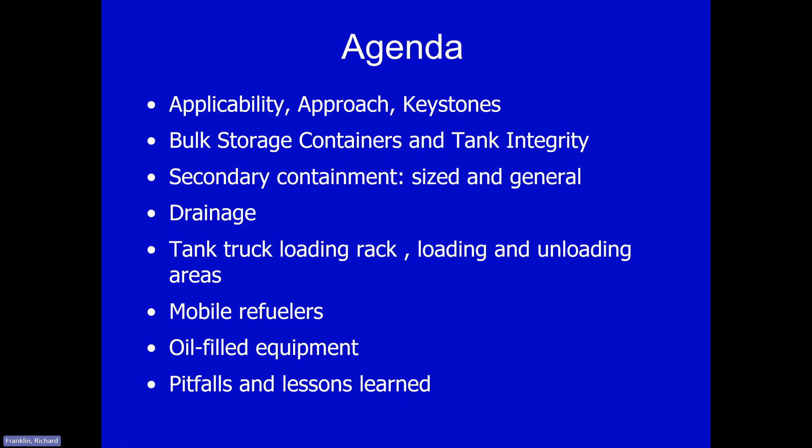So we're going to start off right away. I hope you can hear me okay; if there's any issues, I'm sure Rajib or Amy will let me know. What we'll go through are some major items, components of the rule: first off, some of the keystones, applicability, and then things like bulk storage containers, containment, pitfalls, oil-filled equipment, and some other items like that.

So what is the rule? The rule's been around for a long time, promulgated and became effective in 1974, and the authorization is from the Clean Water Act. This rule applies to facilities that, by virtue of their location and what they're storing, could reasonably be expected to have a spill get to waters of the United States. Some of us joke that it's not authorized by the Clean Dirt Act - everything is based on a threat to a waterway of the United States, or WOTUS.

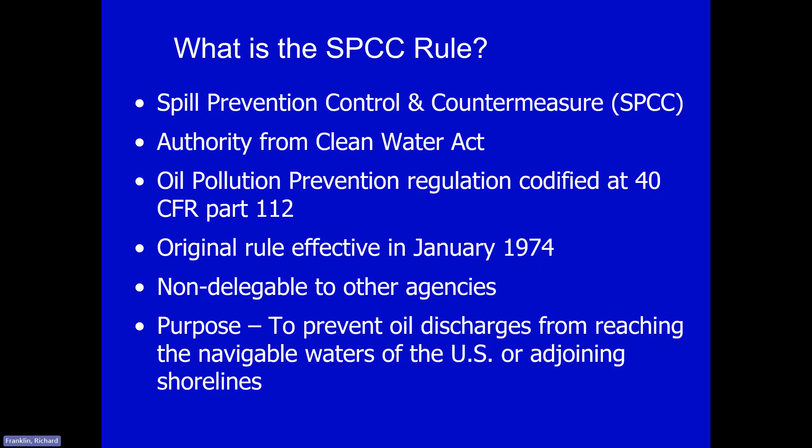Under the rule, they call it navigable waters of the United States and adjoining shorelines, but that's the same thing as WOTUS, waters of the United States. As you're probably aware, that's been in flux with different Supreme Court decisions and litigation. The rule is codified in 40 CFR 112. As Rajib was saying earlier, it is not delegable to any other state, federal, local, or tribal agencies, and the main reason we have this rule is to keep oil out of waters of the United States.

There must be a plan. It's got to be written and implemented, and the plan really should be site-specific. You're going to hear this over and over again from me: it really needs to deal with your site, your waterway, your surroundings, your operations, and how you can prevent oil from getting to waters of the United States in your area.

Some of the keystones, again, are secondary containment and procedures to prevent oil spills. If you have an inspection and there are violations or deficiencies, one of the key things we're going to look for is: do you have adequate secondary containment? Do you have containment at all? You must have measures to control it, keep it from getting to waterways, and be ready to go should you have a spill.

So this is all about keeping oil spills out of waters of the United States and adjoining shorelines - that phrase is in the rule as well. So if the spill gets to the waterway, a creek, pond, or river that's defined as waters of the United States, then potentially enforcement can trace it all the way back up to whatever the adjoining shoreline is.

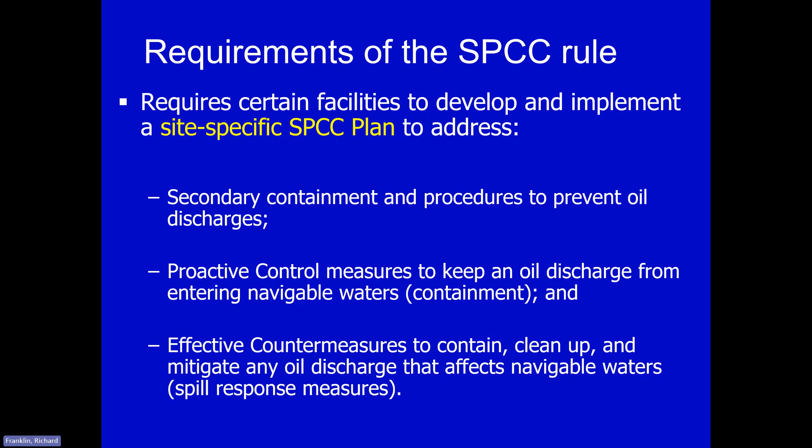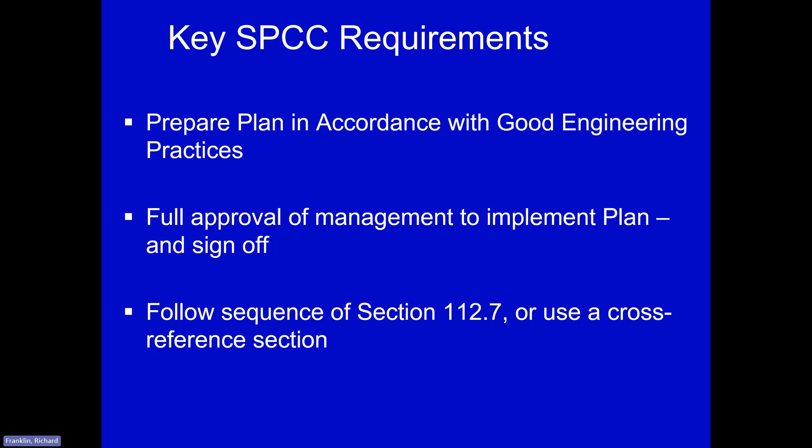So what do you need to prepare? A plan with good engineering practices. Most plans are signed off or required to be signed off by a PE, professional engineer. We look at the PE as a third-party regulator, really, and the plan should have full approval of management, and this should follow the format of the rule in 112. You can use a cross-reference if you like, and we'll get to cross-references a little bit later. There needs to be a signature on a management approval page, and the PE will need to sign off on it, again done with good engineering practices.

As I mentioned a little while ago, this is a site-specific plan. We have plans that show up from companies that may have multiple terminals or facilities in an area, and they might want to write one general plan for the whole thing, for all of their facilities within that area. There may be some commonality between administrative stuff in the plan between different facilities, but really they should be talking about each facility, the waterway that it's threatening, and how to prevent it from getting there, and the procedures at that facility as well. It's fine to have some generic language mirroring the rule, but what we really don't want to see is just generic language only, not dealing with the site-specific information in the facility. What we say is that the plan should mirror what's really going on in the field in your facility, and whatever is really going on in your facility ought to be mirrored in the plan, as far as how you write this.

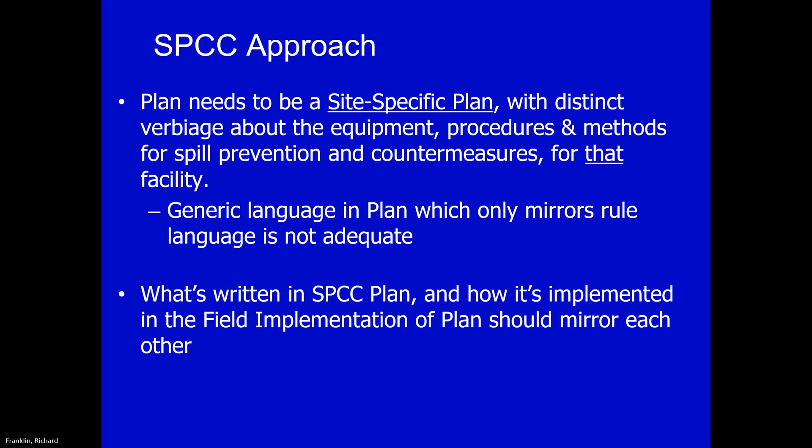Talking to Rajib, he asked me, Richard, what's important? And I'm like, well, okay, so having a well-written plan, implementing that plan. When we show up to do an inspection and review the plan, one of the main goals, of course, is reviewing the plan against the rule. But one of the big things is, can you implement the plan? Is the plan being used as a doorstop, or is it just sitting gathering dust on your bookshelf? You understand that you have to have these for regulatory compliance, but it should really be able to be used. You're supposed to train your employees, your oil handling employees, on it as well. So it should really be implemented.

You should have appropriate secondary containment. We'll talk about containment in depth a little bit. Tank integrity is also hugely important, and you need to have adequate drainage control. So those are some of the big things that we really look for. We'll note sometimes that a plan might be written well, and when we show up at the facility, the plan looks good on paper, but it doesn't really have any reality as far as what's really going on at the facility. Those need to mirror each other.

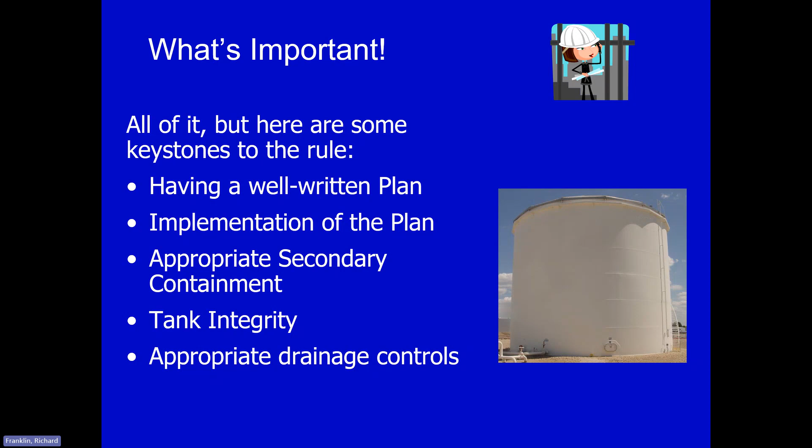We're going to jump right into bulk storage containers. Again, some of the main things in the rule - this is in 112.8C. A couple of things right off the bat: it says that no container should be used for the storage of oil unless its material and construction are compatible with what you're storing and the conditions of storage. So the climate, for instance - what's in your area? Are you in a wet climate like I'm at, here on the West Coast teaching from west of the Cascades where it's very wet? Maybe you're in the Gulf Coast of Texas where I'm from originally, where it's also wet and rains a lot. Conditions of storage - is it salty air, sea air? Are you going to have more corrosion? Maybe you're in a dry place where you don't get much rain. So again, the container really needs to be able to store and be compatible with materials stored, whether it's crude oil, diesel, gasoline, naphtha, whatever it is - construction of it, and pressure and temperature.

And then secondary containment - again, we'll talk about that. You've got to have secondary containment for the bulk storage containers, and you'll note that the rule says bulk storage containers, which includes things that are not tanks, like drums and totes and things like that might meet the regulatory thresholds.

It also says in 112.8c that diked areas should be sufficiently impervious to contain spilled oil, which is interesting, right? We do not have any quantitative rule language or guidance on what impervious means. In 112.7c, which governs the whole rule as far as containment goes, it says you've got to be able to hold oil until it can be cleaned up. In our guidance, we say that should really be up to 72 hours. So we'll get into that here a little bit more.

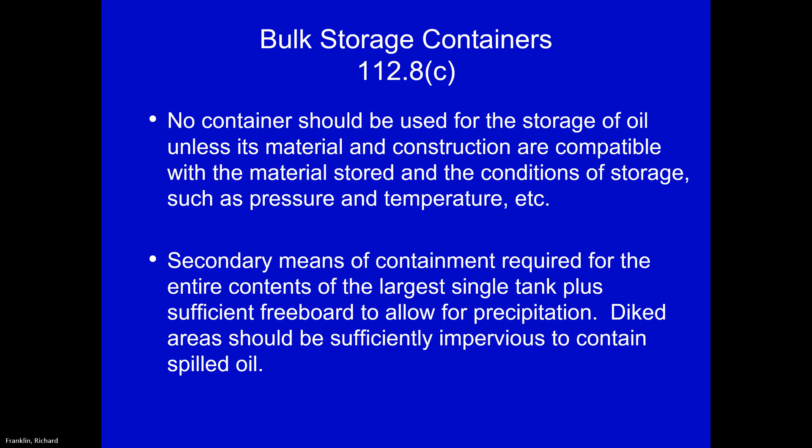Surface rust is one thing, but when we see large-scale pitting and corrosion, delamination of metal, we'll say again that's a violation or deficiency. It's no longer compatible with conditions of storage and what's being stored in it.

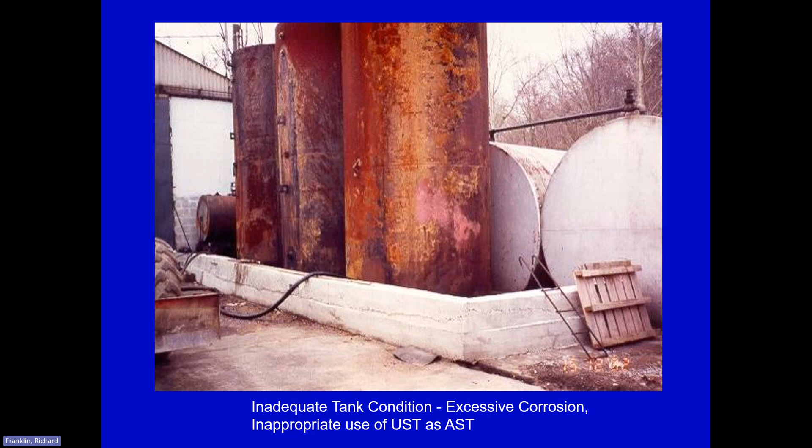They've got some housekeeping problems. The rule doesn't talk so much about housekeeping per se, but that could be a safety issue for you. If you have things like this metal ladder that's against the concrete, if that's leaning up against metal tanks and it just sits there, or other metals, then you can induce corrosion cells and that becomes a problem as well.

So that gets to routine inspections and integrity. The rule says you've got to do routine inspections and tank integrity testing. And for tank integrity testing, the rule says the owner or operator must consult with the industry standards. We'll get to those in a minute to determine what kind of integrity testing is required for the specific type of tank that you have, what's the frequency of it.

Certainly you've got to be doing visual and outside inspections as well, looking for deterioration, leaks that might cause a spill - well, it's already spilled inside diked areas - especially looking at the base of the tank and foundations and supports, because that's where so many of the stresses are going to be. You might have water at the base of a tank too internally, which could cause corrosion or begin causing corrosion.

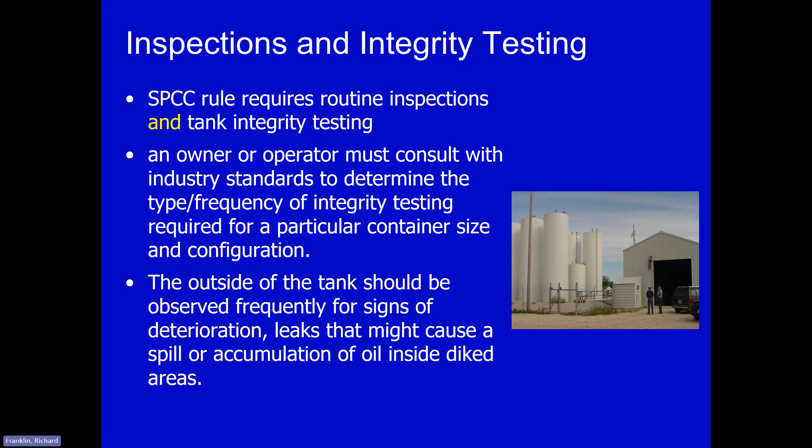So there's a lot of confusion surrounding these. What standard should you use? Now, I'm not a PE, but we look at the standard and what the most appropriate standard is.

So API, American Petroleum Institute - that's the most appropriate standard for large field erected tanks. The Steel Tank Institute, SP001, is most applicable for shop-built tanks, drums, totes, and some small field erected tanks.

Now, we have our own PE, actually with EPA, that sits on one of the technical boards of STI for SP001, and that's helped us try to understand and be more flexible and realistic on how that standard would apply to these smaller containers. We see that smaller tanks are often completely overlooked.

For instance, at a bulk storage terminal, refined products marketing terminal, distribution terminal, the facility is certainly doing API 653 integrity testing for their larger tanks - 55,000, 80,000 barrel, 30,000 barrel, 100,000 barrel tanks. And then they forget, in the 10,000 gallon additive tanks, that those also have to be looked at as far as tank integrity testing.

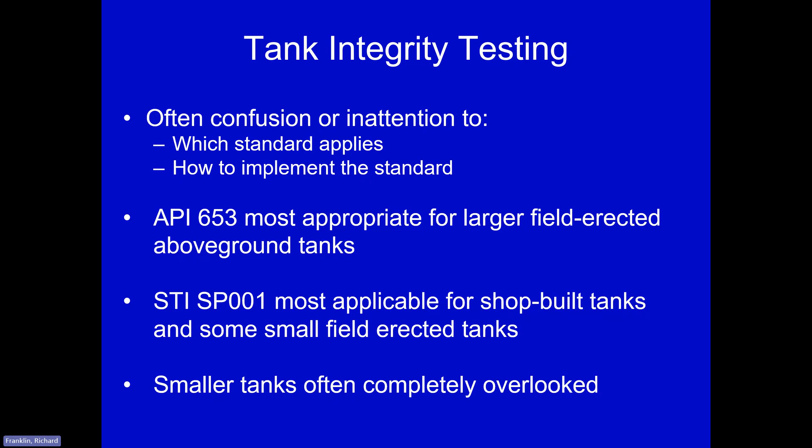Again, API 653, what does it cover? Field-erected steel storage tanks built to the API 650 construction standard and its predecessor, which was API 12C. Specifically developed for vertical petroleum storage tanks with a maximum internal pressure of no more than 2.5 psi and a temperature not exceeding 200 degrees Fahrenheit per the scope. The tanks that are heated higher than that have other standards that apply to them.

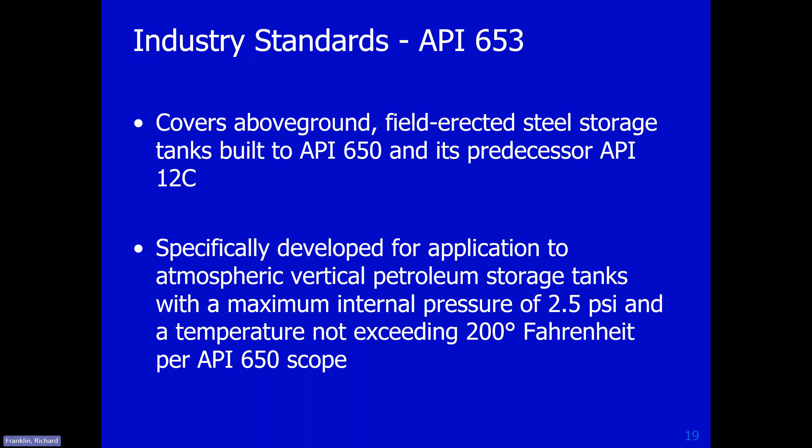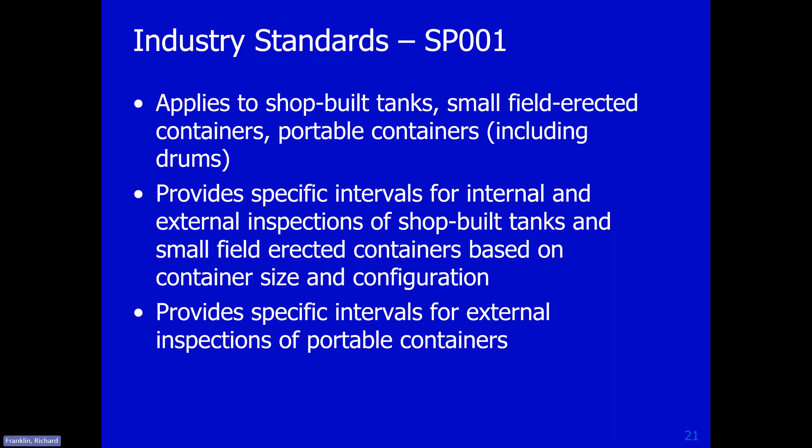SP001, the Steel Tank Institute standard, applies to shop-built tanks and some small field-erected tanks and portable containers. It has a chart laying out specific intervals of internal and external inspections of shop-built tanks, based on size and configuration, and gives specific intervals for external inspections of portable containers. Most of the inspection interval is monthly and annual. Depending on tank size and configuration, and whether it has a release prevention barrier or secondary containment, it may only need visual inspection for much of its life, which gives a lot of flexibility. It's not quite as rigorous as API 653 might be, certainly for smaller tanks.

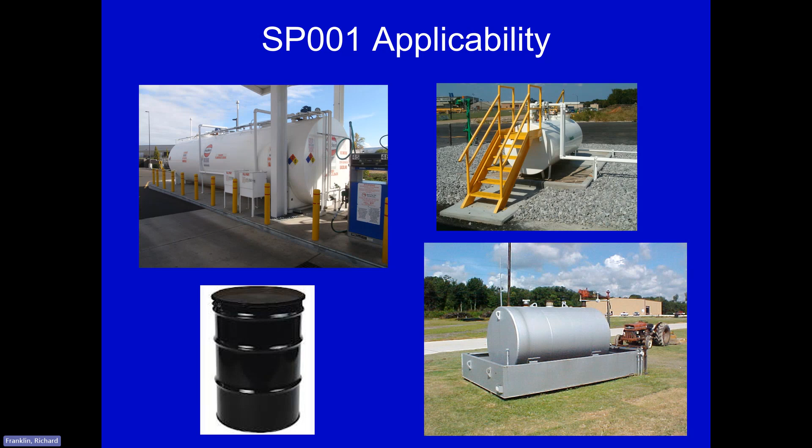Here you see some examples of shop-built tanks. The picture in the upper left-hand corner is a 20,000 gallon double-wall tank, above ground, so it has secondary containment and a release prevention barrier underneath it made of concrete. These other photos are smaller. The photo on the top right is a double wall tank as well, with extra curbing around it, which is a nice thing to have. Then there's the drum, and the lower tank on the right, which is a single wall tank, but they've got good metal secondary containment. SP001 applies to all of these, and most of them require monthly and annual inspections.

Who's responsible for doing this? For the longest time, we saw that companies were not doing these inspections, especially smaller companies and some others like the asphalt industry. We're hoping they're doing them now. But the owner operator is responsible, and the law and regulation says owner operator, not just owner and not just operator. We've had instances where we've done inspections and the operator, for instance at a large airport in the U.S. owned by the city, had lessees and fixed-base operators, FBOs, working there. The city refused to let the operators fulfill some of the things they needed to do to be compliant with SPCC, so the owner, the city, got fined. The law says owner operator. When we do inspections, the first entity we look at is really the operator - who's operating the tank, who's maintaining it, who's taking care of it.

In these photos, we're going to be looking at the whole tank, but certainly the base and the chime of the tank, the welds, and maybe bolted or riveted tanks as well. This particular tank, where that pin is, and also on the right-hand photo, shows delamination of the chime. We noticed this corrosion - not just peeling paint, but large-scale pitting and corrosion. We pointed this out to the facility. They had not done any internal integrity inspections, and a month later it failed, and they lost 1 million gallons of asphalt cement or asphalt oil. So we don't hold the PE responsible - we hold the owner-operator responsible.

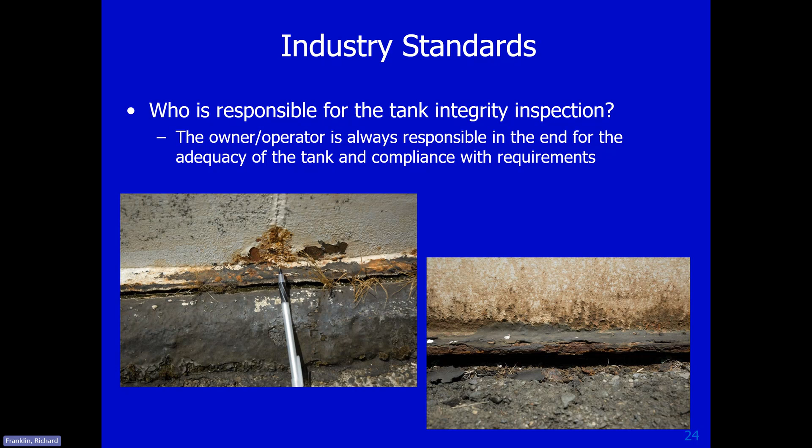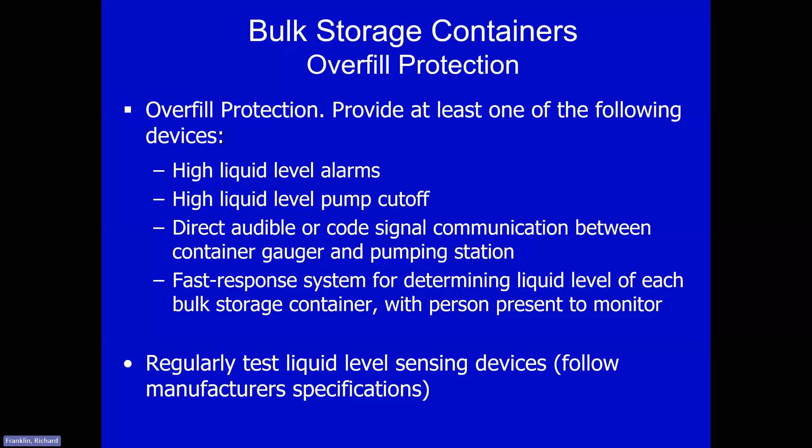Now let's get to secondary containment. There's the word that starts out right away in 112.7c: appropriate secondary containment. So it's got to be appropriate to what you're holding.

If we go to the Gulf Coast or the West Coast or East Coast and see a tank of gasoline with a berm made out of crushed oyster shell, that's not appropriate, right? It's not appropriate to use kitty litter as secondary containment for a tanker truck at a loading rack. You're not going to really be able to hold that. We've seen some of those things.

Again, it's in 112.7c, it says the entire system must be capable of containing oil so that a discharge from containment will not occur until cleanup occurs. In preamble and guidance, we say that should probably be about 72 hours.

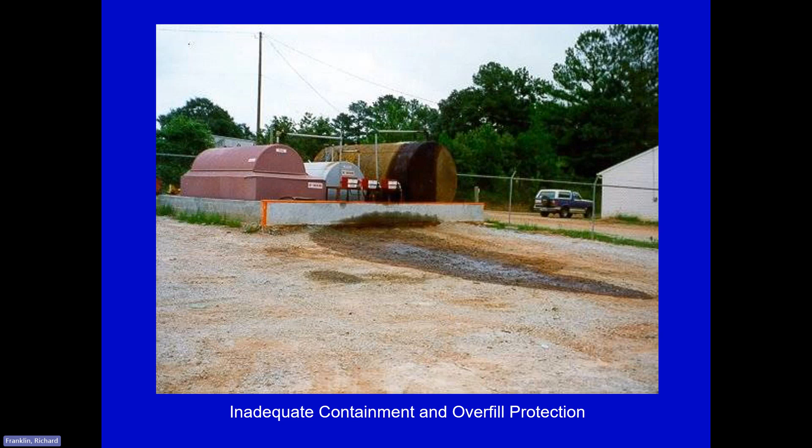Diked areas around bulk storage tanks should be sufficiently impervious. We're not going to take some sort of quantitative measure to see if it's impervious, but if we see this showing up, we're going to tell you it's not impermeable, right? It's as simple as that.

But you have a choice, right? There's some flexibility depending on the size of the tank, the volume, or container. Again, the volume and the material itself—whether it's asphalt, lube oil, gasoline or diesel—with different viscosity. So you can do dikes, berms,

retention ponds, spill diversion ponds. I was at a large terminal that lost a tank that shifted suddenly, an older tank, and it lost 55,000 barrels of crude oil. But they had a system of ditches and retention ponds, and it all got caught on site, was stopped from getting off site.

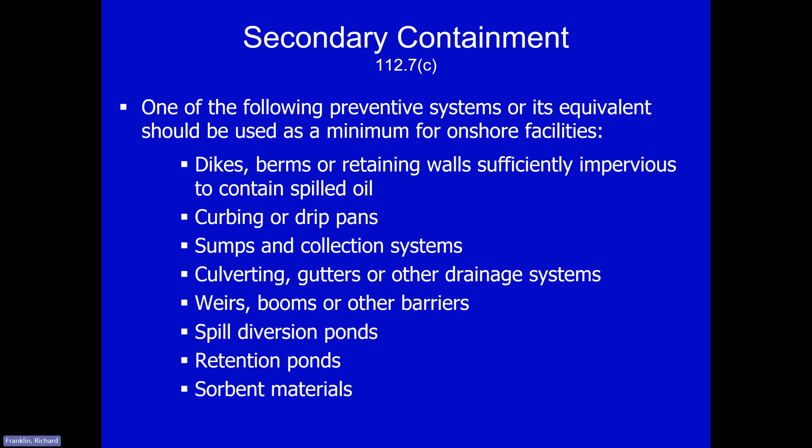If that's what they want to do for containment, that's perfectly fine, but again, it needs to be appropriate. Now here's the thing that really confuses people: size containment versus general containment. The beginning of the rule in 112.7c says you've got to have containment for everything. And then further down in the rule, like in 112.8, it tells you you've got to have specific size containment.

So that's where it says for bulk storage containers, you've got to have the size of the largest tank and freeboard in that general area. So for all bulk storage containers—and there's a definition of bulk storage containers: tanks, drums, totes, loading racks—also have to be contained. But bulk containers have to have specific size containment, and that's the volume of the single largest container in common containment plus freeboard.

Everything else is what we call general containment. So, for instance, piping outside of containment, transformers, oil field equipment, oil field operational and manufacturing equipment, piping runs—those do not have to have containment that's specifically sized. In other words, the rule doesn't say you have to have a specific size or volume for it. It doesn't say the volume of the highest rate of liquid going through that pipeline.

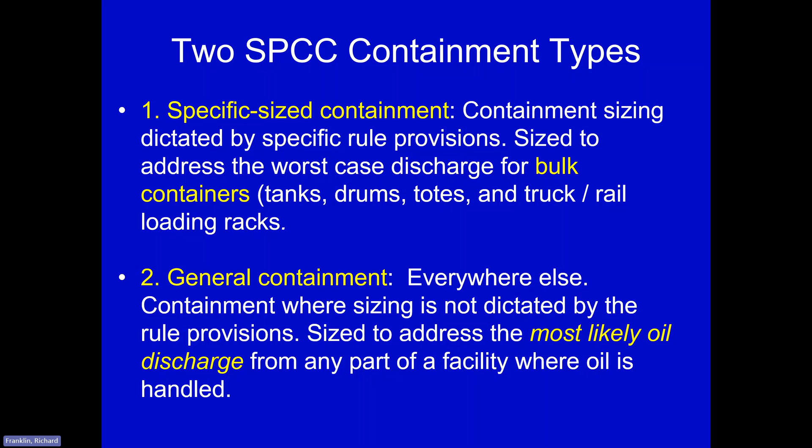So again, for bulk storage containers, that size of containment, because the rule says it's sized - it's the volume of the largest single container with sufficient freeboard for precipitation. You've got lots of flexibility, an earthen berm. You could have concrete walls. For earthen berms, as long as it'll hold the stuff, that's good.

Again, we don't look at quantitative measures. Some people want grass on top of the berm, some people don't. If you've got grass on top of the berm, we're going to say, can you inspect the berm and make sure that it's got good integrity?

Many places do not allow vegetation on top of the berm so they can see through to the gravel or the soil, to see if it's cracked open. If we see large rooted vegetation, we're going to say that's inappropriate. That happened up in Alaska recently on one of my inspections, because there were trees growing out of the berm. The roots and animal holes can compromise the integrity of the berm, and we've had spills that go right through those holes. So you've got to be able to make sure the secondary containment has good integrity. No trees, please.

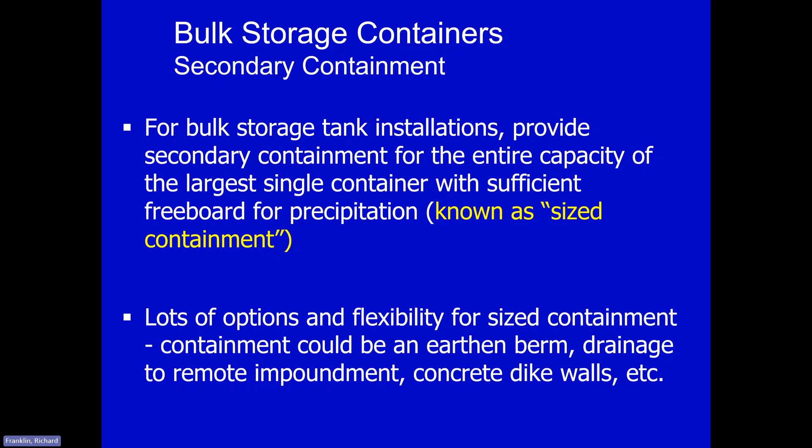For freeboard, again, for precipitation, we did not set a standard. People are used to this, and they say, well, it's 110% of the largest tank - 100% of the volume of the tank plus 10% for freeboard. There's no such number in the rule. It's not 110% unless you believe that 110% is appropriate for that containment, given the location you're in and the design of the tank and where you're at. That's fine, if it's signed off by the PE. But 110% is not written into the rule.

Again, the proper method is good engineering practice. We say base it on your site-specific precipitation. If 110% works for you and works for the PE, fine - it may or may not be acceptable. That 110% we believe came from the American Petroleum Institute from years ago. That was sort of a rule of thumb for people.

All right, let's move on. I hope that's clear. The guidance that we have in that inspector guidance, we suggest - and this is not enforceable, but we suggest it as a best management practice when the engineer is considering the freeboard calculations - what should you have? We suggest a 25-year, 24-hour storm event. It is good for looking at precipitation. It's not a requirement, but we would suggest that as a best management practice.

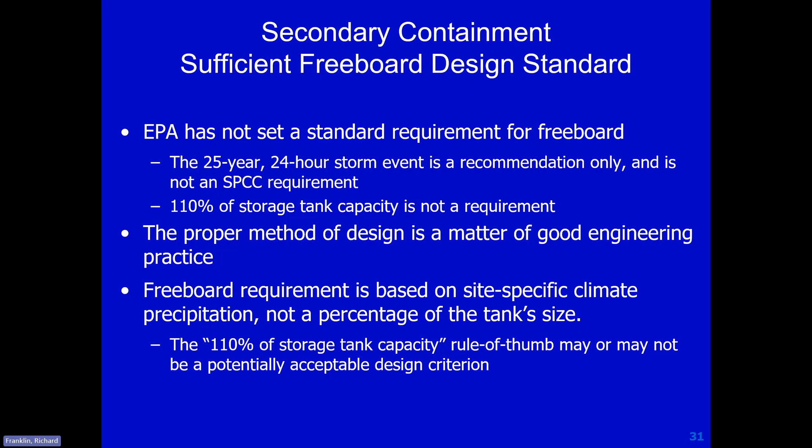Now, we've had incidents where a hurricane or a tropical storm came through and there was a whole lot of water in containment, and things got out of hand. The SPCC rule is not meant for particular hurricanes - there's nothing in the rule that talks about hurricanes or large storms. It's the volume of the single largest tank plus precipitation, again, as signed off by the PE.

Active measures, I mentioned this a minute ago. The rule, after our amendments, allows what we call active measures, meaning a person takes an action.

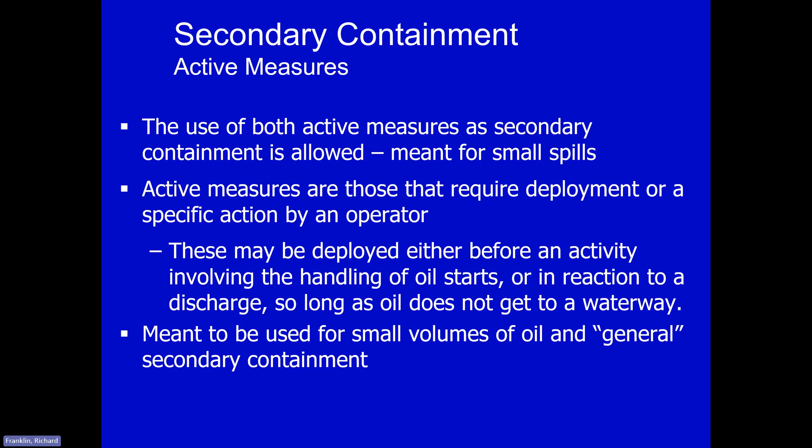Like, for instance, taking a mat built for a storm drain and putting it over the storm drain before you load or unload oil from tanks, containers, or trucks. It's really meant to be used for small volumes of oil and general secondary containment. It's not meant for large expected spills like those from a tanker truck.

The key is this: if you're going to use an active measure, then it's got to be at a location that you can get to it easily. The spill kit ought to be rated for that volume of the spill you're going to clean up. You've got to be able to deploy it in a timely manner, and you've got to be able to discover it in a timely manner. If it's in an unmanned facility like oil field production, like a lease, and the gauger or pumper doesn't get to it but every 2 days, that's not going to be appropriate. It's got to be looked at on a regular schedule and be able to deploy it in a timely manner.

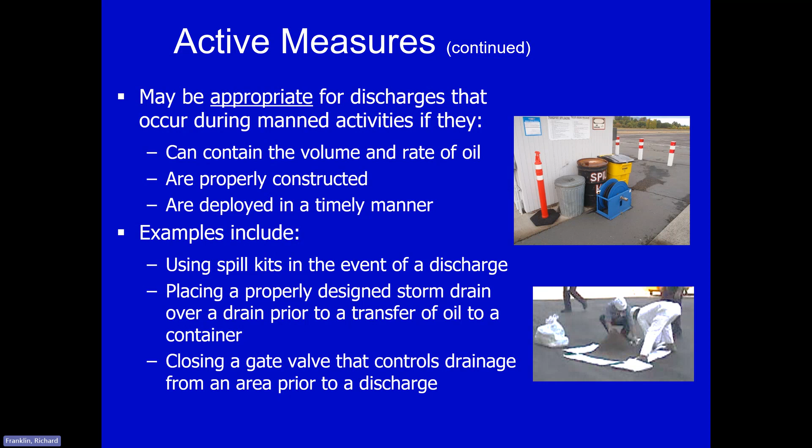So here's some examples: using a spill kit, I've already mentioned that a couple of times. A properly designed storm drain, closing a gate valve that controls drainage from an area prior to a discharge.

So general containment again applies to non-bulk storage containers and transfer areas. Bulk storage containers are defined in the rule. There's no specific size volume requirement, I mentioned that a little while ago. You look at the most likely spill scenario, you determine the volume for it, you provide containment for that volume, and then you've got to write this in the plan.

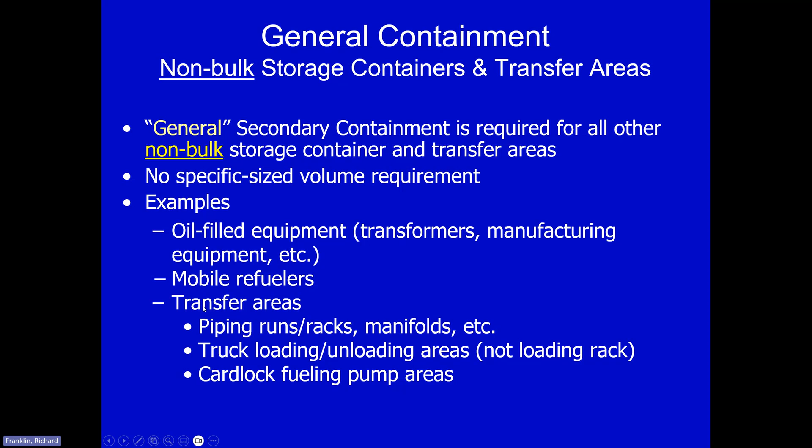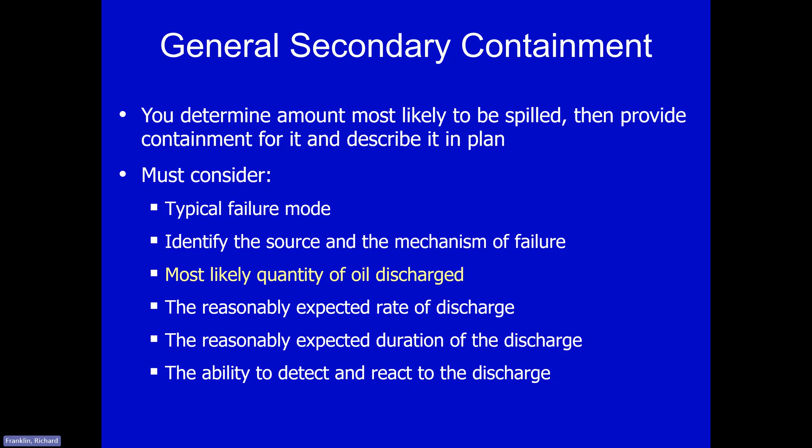You should be detailed in the plan: our most likely spill scenario for this piping area is blah, here's containment for it. So oil-filled equipment, transformers, mobile refuelers, transfer areas, we mentioned that earlier. I've gone through this probably ad nauseum now, but you can always ask another question. You should consider the typical failure mode, what's the most likely quantity of oil, and you've got to have the ability to detect and react to the discharge in a timely manner.

So I'm going to move on. I'm taking a lot of time here.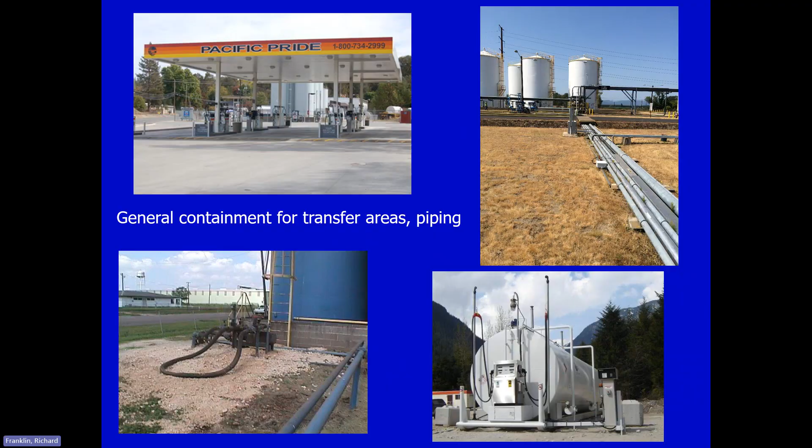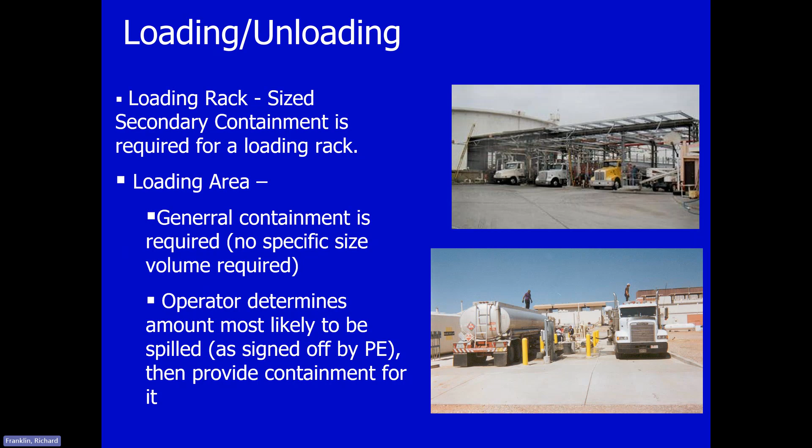But most other areas are not a rack. They're a loading, unloading area, just like this photo here on the lower left, where they load in and out of that tank. That's not a rack, it's a loading area - general secondary containment. Same for this lower photo here, where these tanker trucks have a single load line going into the truck, and it's not a rack defined regulatorily. So again, the owner operator decides what's the most likely spill volume and provides containment for it.

Let's move on to drainage. We've got two areas really to consider. One is drainage from diked areas around the tanks or drums.

If you have dikes, then you have to restrain when you drain from there. Typically the valves have got to be closed. You need to check for oil, remove the oil first, and then drain under responsible supervision, and then close the valve and make sure it's secured. The valve should be manual, open and closed. We don't want to see an open valve inside secondary containment or at a dike or berm. We've had spills where it went straight out that open valve, right out to a waterway.

So that's dike storage areas. Again, you check it for sheen, remove the oil, and then you can drain it out. If you drain it directly out, you can drain it out. You could also drain it to a wastewater treatment plant on site. That's perfectly fine.

The next area is drainage from undiked areas where there's oil. So in oily areas, like piping runs, loading and unloading areas, you still have to not only have some sort of containment, but you have to consider drainage from undiked areas. The rule talks about drainage from diked areas and from undiked areas. At the end of the day, if you have an oil spill, it's got to be caught. If there's any drips or leaks or whatever, it's got to be able to be retained on site.

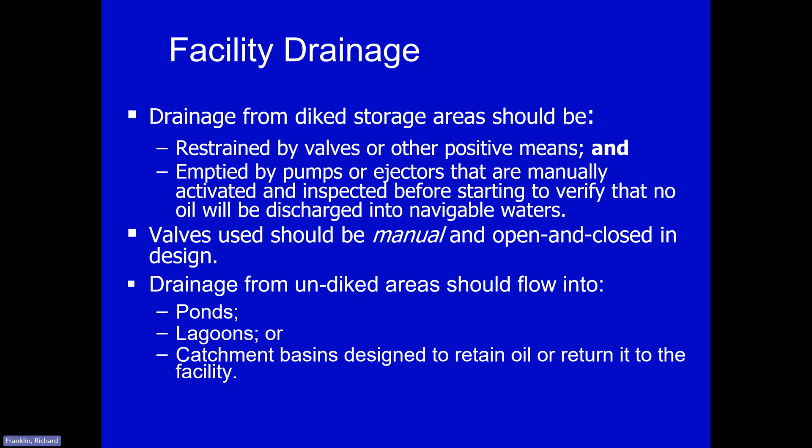So the rule says you can go to ponds, lagoons, catchment basins, maybe sumps - general secondary containment for undiked areas. Maybe you're only going to lose like 10 gallons, so maybe you've got a catchment basin that things flow to. It's designed that way and it'll catch it. That'll work. Here's a couple of photos.

These are photos in the Pacific Northwest. I inspect a lot of hydroelectric dams, and these tanks could exist anywhere though. On both of these, the left photo is a double-walled tank. That's great, so it has secondary containment for the tank. But what people were not thinking about was that a tanker truck comes up here occasionally and loads into that tank. What about secondary containment for the transfer area? What about drainage for the transfer area? Drainage is undiked, and you have to have general secondary containment for that transfer point.

Same for this tank on the upper right. This is on the upper deck of a dam, right over, I think this is the Snake River maybe.

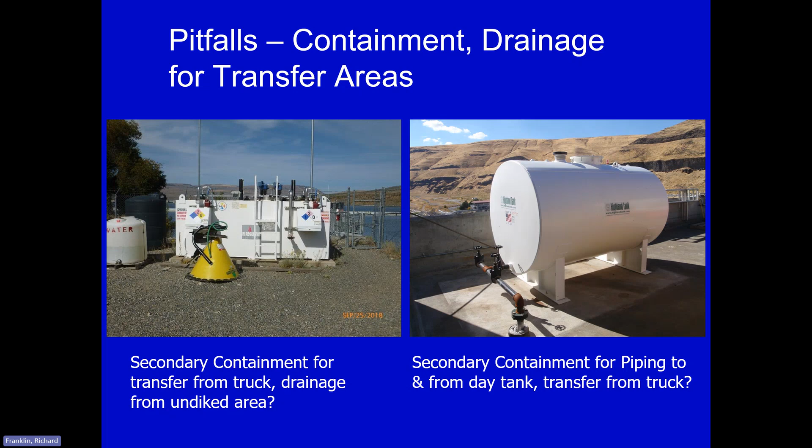And so the truck will come. That's certainly a transfer point. There has to be general secondary containment and drainage thought of. There are expansion joints in this concrete deck, and if they spill something, it's going to go straight down through the expansion joint into the river. So that's something to consider. Also consider the pipe on that right tank going in and out - that's in an undiked area. How are you going to contain the spill from that? What's the most likely spill scenario? What's the volume? You have to have containment for it.

So I'm going to move on. We'll find some common inspection pitfalls, things we've seen over time. One thing is certainly a poorly written plan, or the PE or plan writer has little experience with the regulations. They don't understand them, or they don't understand the amended regulations.

We sometimes get very generic plans. And again, I talked about site specific - please make it a site specific plan. It's good to have regurgitation of some of the rule language. Some places will do that - they'll put a paragraph with the rule language, and then below that, they write in specific language: this is how we do it here.

The writer is not taking into account specific detail - I just mentioned that. And the other thing we often see is a poor understanding or demonstration of tank integrity requirements.

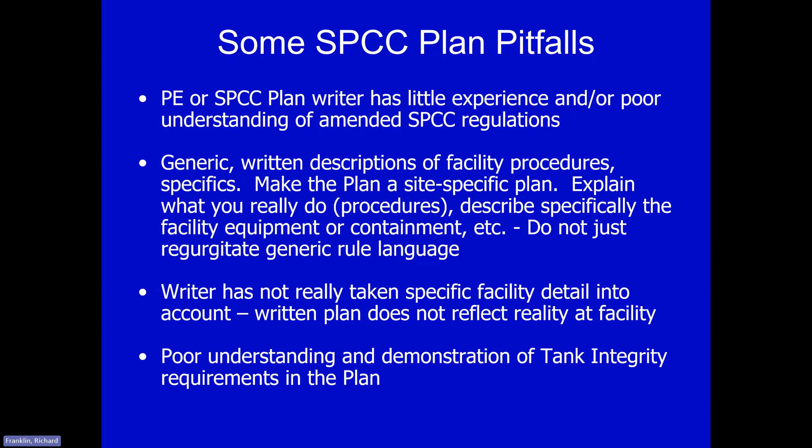What I found recently is when there is a cross-reference, it's general - there's not enough site-specific citations there. And the thing I like to see is if you have something that's not applicable, please say so, or put it either in a heading or the table of contents.

For instance, if you have shop-built tanks and you follow SP001, there may not be a need to do brittle fracture analysis. The rule talks about a brittle fracture analysis for field-erected tanks whenever there's a change or repair. Well, if it's not applicable to your facility, it's helpful for an outside reviewer and for your own people, because you're going to be training your oil handling personnel, to say either in the cross-reference or table of contents: 112.7, not applicable at this facility. I like to see that personally, or maybe you've got a header inside a chapter or section that says brittle fracture analysis, but it's really great for me or for an outside reviewer to go, it's not applicable here because all these tanks are shop built, right?

I think that's very helpful for us as outside reviewers. When you write the plan and it's your facility and you're there all day in and out, some writing may be very clear to you because you know in your head stuff that's not really specified in writing - you already know it, everyone's familiar with it, oh that's good. But for an outside regulator, or someone like me, or maybe an auditor that comes along, I don't know that facility. So sometimes little things like that are very helpful, right? Because then I'm searching through the plan trying to find out, is this applicable or not?

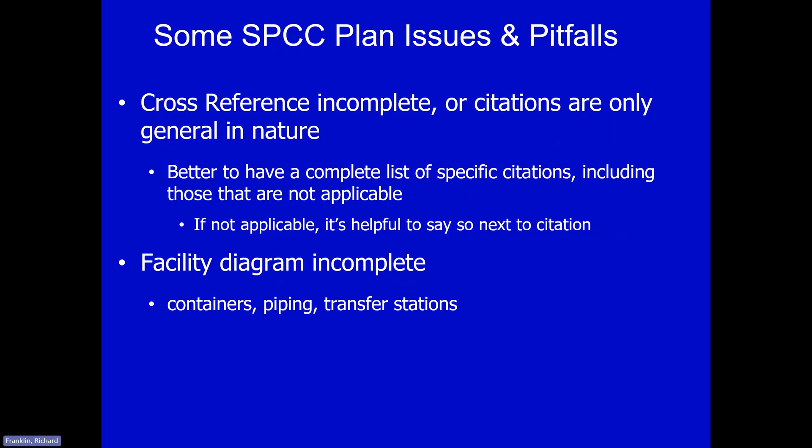We often find facility diagrams are incomplete. Let's see, I was going to go through that a little bit more, but you've got to have the containers, the piping, and transfer stations, right? Transfer areas, again, like what we just talked about. Piping is a thing all its own. A lot of facilities are like, well, I'm a refinery and I can't show every single little pipe, right? Not on your plan. What we're looking for is sort of a process flow diagram, the main piping to and from, where it's going. You don't have to show every single little pipe.

Tank integrity schedule - we will ask for that so we can evaluate whether you're implementing your plan or not. It's nice to see those in the plan. They don't have to be in the plan, but it's best laid out in a table: list your tanks, here's the standard, here's the date of the last external API 653 inspection, here's the date of the internal, external, when the dates are due - same for SP001. That's very helpful to see. Another problem we have is the failure prediction in the rule.

And I mentioned this earlier, for general secondary containment, a lot of times people use the worst case discharge for containers when they don't need it. If the corporation and the owner and the company decide that's corporate practice and you want to do that, that's fine. If they say we want to consider the worst case discharge of 13,000 gallons from that piping that goes to the aircraft transfer area, fine. But you don't have to. Make it easy on yourself.

Again, I'm not a PE. We do have some PEs on staff, but we can't be your PE and write it for you, right? We can offer up suggestions, best management practices. And if you choose that you want to use worst case discharge, well, that's fine.

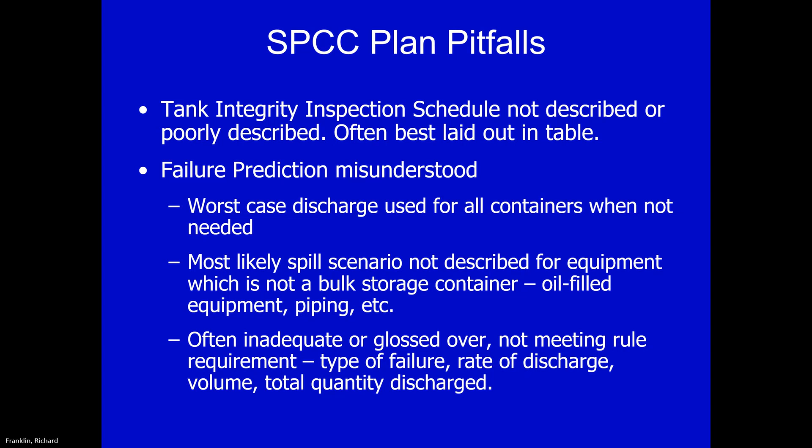So let's see, for this failure prediction, the rule says you should be looking at the most likely scenarios. What's going to spill? What's the rate and volume of the oil getting out, and where's it going to go? So the rule requirement is what's the type of failure, given your experience at your facility. Oh, it's a cam lock failure on this hose, and the rate of discharge is going to be 10 gallons an hour. All right. So what's the total and where is it going? So there's some homework to do.

We talked about general containment. I probably made everyone go to sleep talking about that. But again, it's often misunderstood. I want to make sure we can clear that up as much as possible. So we often have a poor description or no description of what is the most likely spill scenario and the volume. That should be written in the plan, and often we don't see that.

Now, if you're claiming impracticability for secondary containment for bulk storage, for some reason you can't have secondary containment, you can make an impracticability claim. If you do that, then you have to have a contingency plan. And the rule says the contingency plan should follow 40 CFR 109. Now, if you go look at 40 CFR 109, it'll say contingency plan. I don't have the rule in front of me, but for like states, cities, counties, local governments. Well, and you're like, wait a minute, I'm not one of those. I'm private, or commercial. It doesn't matter. You got to follow the format of 40 CFR 109.

So we often find just a general contingency plan and not site-specific stuff for that place, that waterway, the staff working it, the emergency responders, the call-down list. So we need, again, some site specificity.

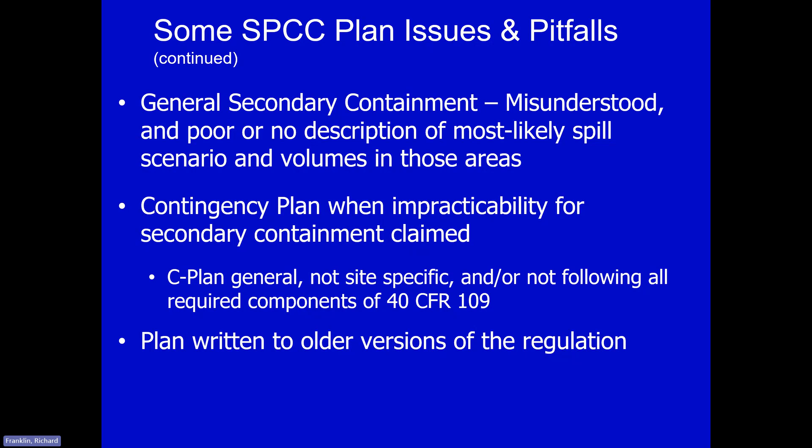And so that we changed the rule during some of that time to try to give more flexibility. That also added a little bit more complexity, but to give some more flexibility if we could.

All right, diagram requirements: location and contents of fixed oil containers, storage areas of mobile or portable containers like drums, location of exempt underground storage tanks, connecting piping and transfer stations. That's all you have to have.

And if you're training your own folks, or you got new employees, that might be good for them too. You're supposed to train on this SPCC plan.

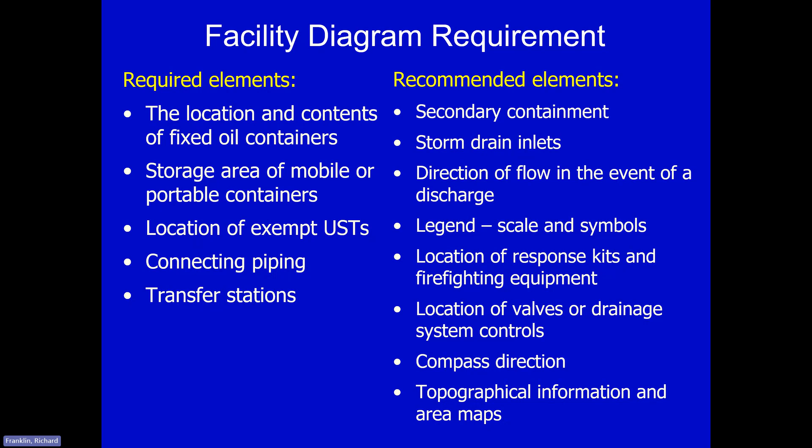Failure analysis. We mentioned this a little while ago. Again, you do a failure analysis, often done in a table, where experience indicates reasonable potential for equipment failure. Maybe not everything—where does reasonable experience at your facility show you might have equipment failure? Tank loading or unloading equipment, overflow, things that are known to be a source or potential source of discharge.

And in this table, or you could do it in verbiage or language in the plan, what you have to predict is: where's it going, what's the rate of flow, and what the total should be. It's that simple. It may take some time if you've got a lot of equipment.

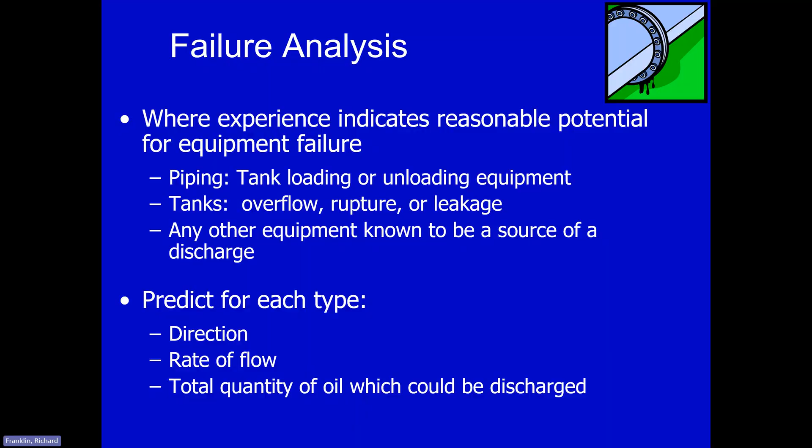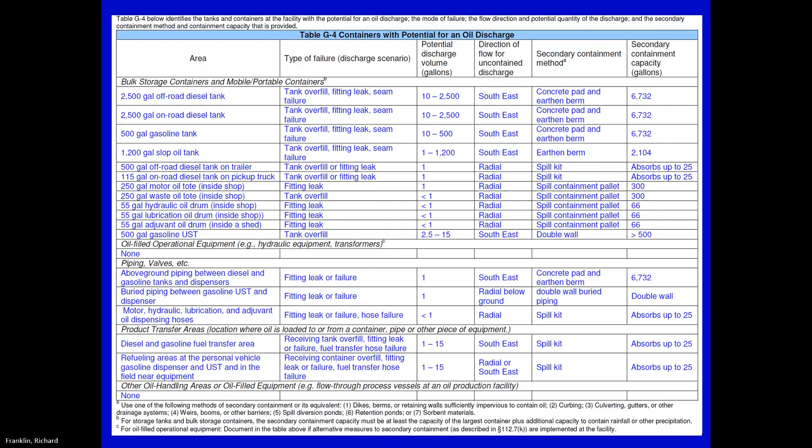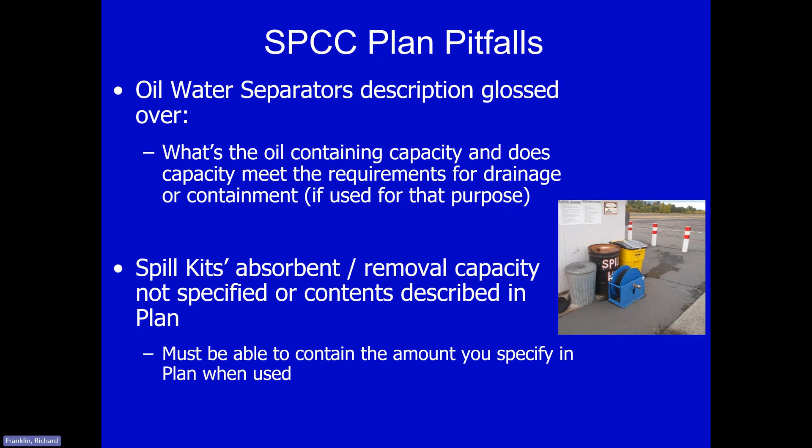Here's some plan pitfalls. We haven't discussed oil water separators much, but if you're going to use an oil water separator for secondary containment, then you really need to discuss the capacity, rate, and volume of that oil water separator—how much oil can it really contain, just like you would secondary containment. We've already talked about spill kits and their absorbent removal capacity. That ought to be discussed.

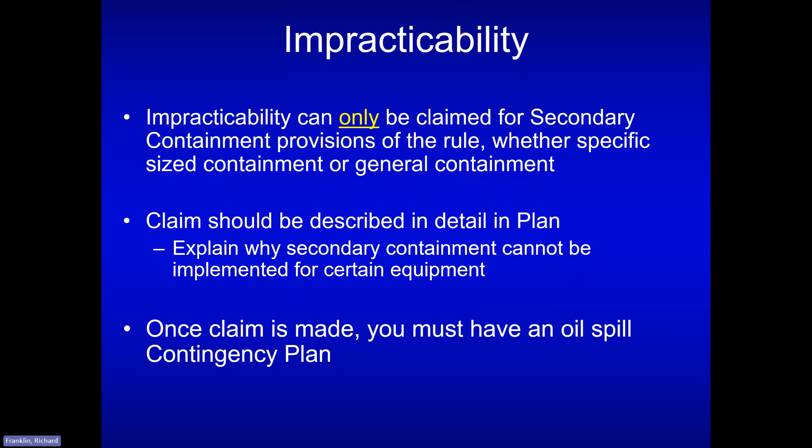Impracticability—we mentioned that a minute ago. When you make that claim, you should really describe in the plan why it's impracticable. And then you've got to have that contingency plan following 40 CFR 109. What we often find is, again, general writing and not site-specific writing on 40 CFR 109. But you really ought to lay out what are the duties of your persons responding, what's the notification procedures.

Well-defined and specific actions to be taken after discovery and notification. And then things like, how do you facilitate recovery of damages and enforcement measures?

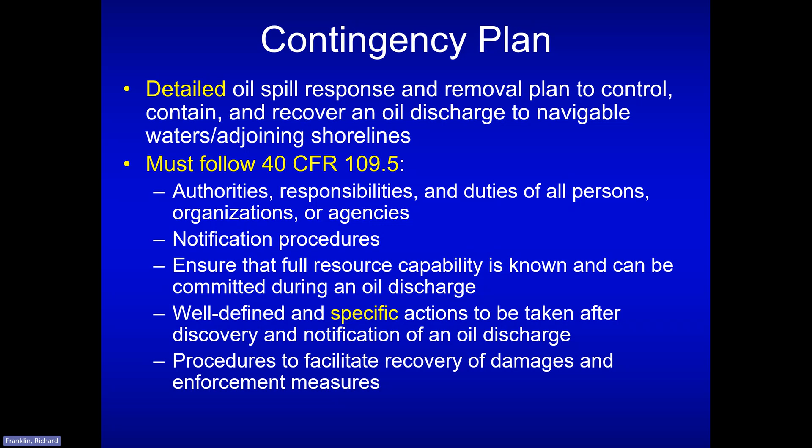I was entertained by one of the hydroelectric dams because their contingency plan said, as far as notifications, they're going to call the NRC—not the National Response Center. Their contingency plan was for calling the contracting company that does removals, NRC, National Response Corporation, which has been bought and now has different names. But again, specificity has been a common theme we've talked about today, but 40 CFR 109 is what you need to follow.

I mentioned this already, I'm going to move on. You must have a written commitment of manpower, material, signed—equipment, materials to expeditiously control or remove a spill.

On our website, we have a national website. Rajib mentioned this earlier about our guidance for regional inspectors, which was updated in 2013. It's meant to be dynamic and updated again. The website link is here. That website, and the main website it's on, goes through a lot of presentations and information and helpful information to help you with being compliant and understanding the rules.

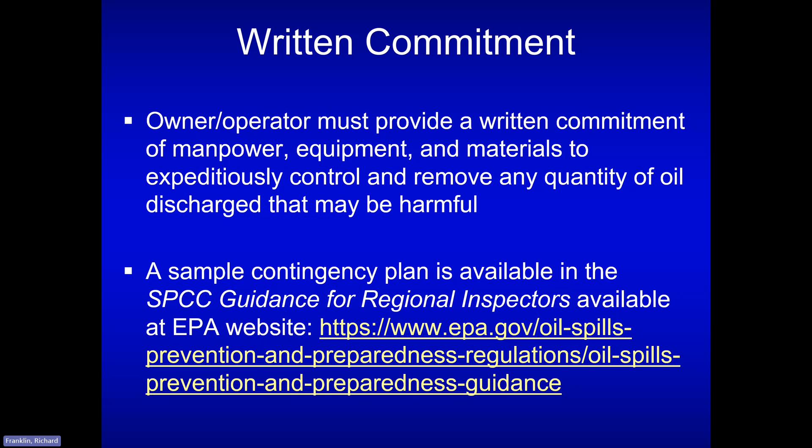We put that guidance together to help the public, but also for transparency on what we're really looking for from industry. Here's what we're really expecting, and of course, for our own inspectors. It helps us try to be more consistent. We're not always as consistent as we would like to be, but this lays it all out.

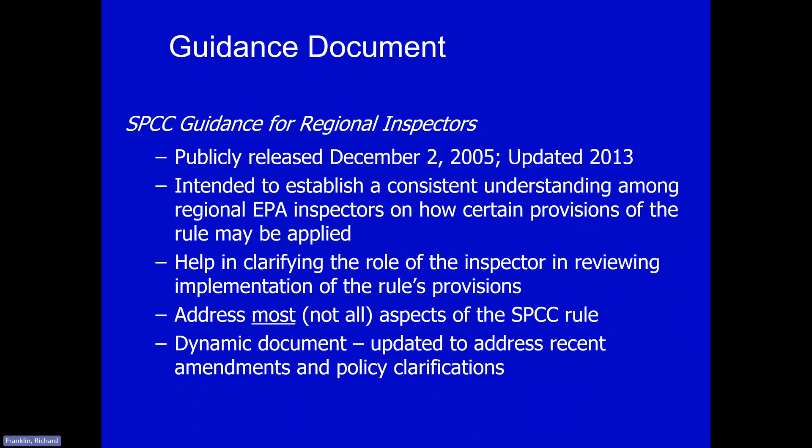Here we go again. It's released in 2005, updated. It addresses most aspects of the rule. Again, intended to establish a consistent understanding amongst our own inspectors as well as industry. And that's it for now.

We have some other slides, if need be, we can go through. On that EPA website, if you go through it, you find guidance and references.

You'll find a map listing each EPA region. There's a list of the oil, SPCC, and facility response plan contacts. I'm one of them for Region 10. We have a person in each state, or you can just always call me, or you can look it up for the state that your facilities are in, that you're writing plans for or operating in.

We also have a 1-800 number. It's called the Superfund TRI, EPCRA, RMP, and Oil Information Center. Contractors are manning that line during the day. They might be able to help as well.

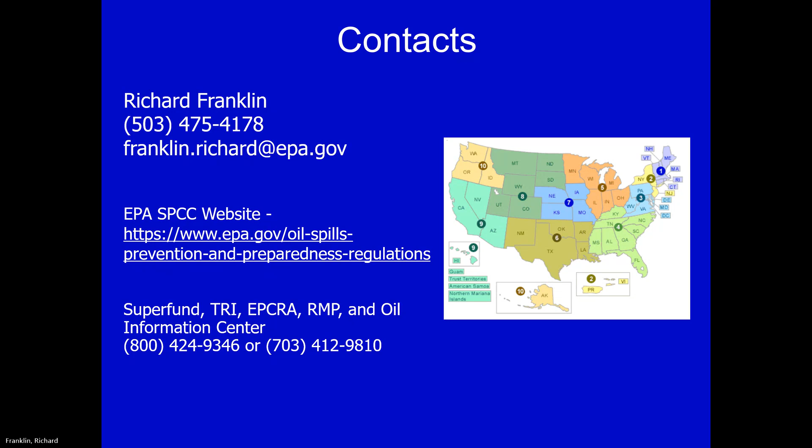So, Rajib, I think that's it. I stumbled around a little bit. If I've gone south, hopefully you'll jump in and correct me or have some questions, maybe.

Thank you very much, Richard. That was absolutely a fascinating presentation. For those of us that have written many SPCC plans, and always wondered how good they are, because as I mentioned before, they're not reviewed and you don't really understand how good they are until you have to implement them.

We have actually come up to the end of what we had for an hour, but we do have a couple of questions in here that if people can hang around for a little bit, I wouldn't mind getting a response to. One of the questions that came up is on the technical impracticability for secondary containment.

Facilities, you have seen facilities where this exemption claim's been made. We've made it on behalf of certain facilities where it's difficult to have that secondary containment. But when you do evaluate the claim and you look at a plan, what are your thoughts on adequate documentation as to exactly how thorough that should be, and the follow-up contingency plan with that?

That's a great question. I don't... I'd have to go back and look. I don't think we've got much verbiage in the rule about what is the sort of documentation required, right? So we're going to probably look for a statement that just explains it well. Maybe there's safety concerns. I know for the hydroelectric dam, sometimes things go into a big sump and pumps turn on for that sump regularly and flush everything out to the river, and they can't shut those pumps down or they'll flood the dam.